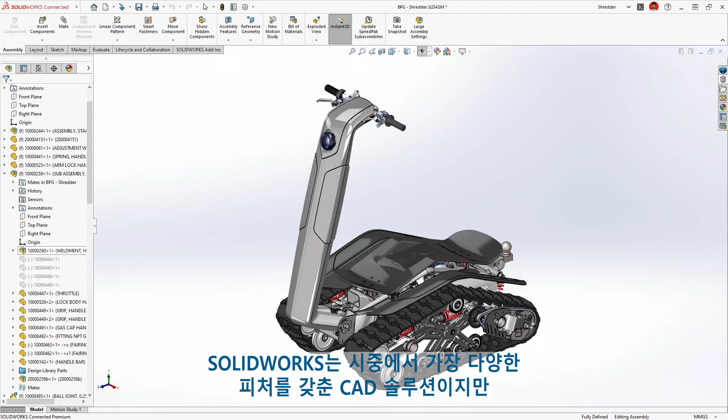SOLIDWORKS is the most feature-rich CAD solution available, but that doesn't mean significant improvements can't be made. In SOLIDWORKS 2023, we focused on expanding the capabilities of existing features to make you more productive.

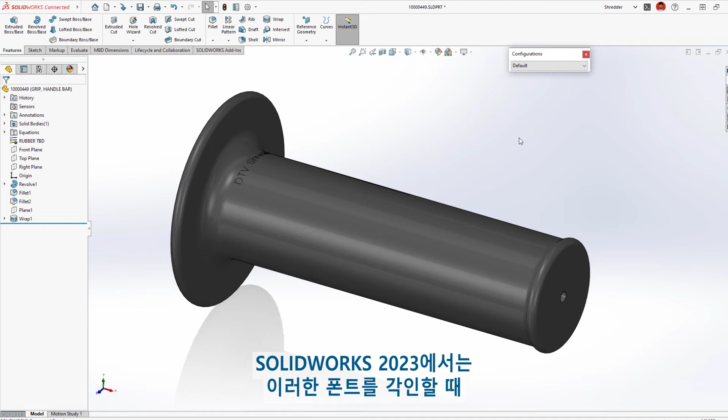Inscribing information such as serial number or model names into cylindrical surfaces is best done with single-line fonts. SOLIDWORKS 2023 allows you to inscribe these fonts using the wrap feature.

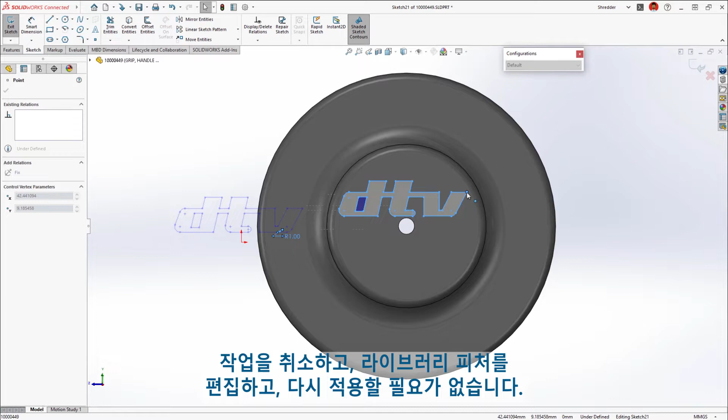Adding the DTV logo to the end of this handle is easy with library features, just drag and drop. However, in some situations, a reference may not be valid or otherwise broken. In 2023, you now have the option to keep the feature and solve the issue manually, rather than having to cancel the action, edit the library feature, and reapply.

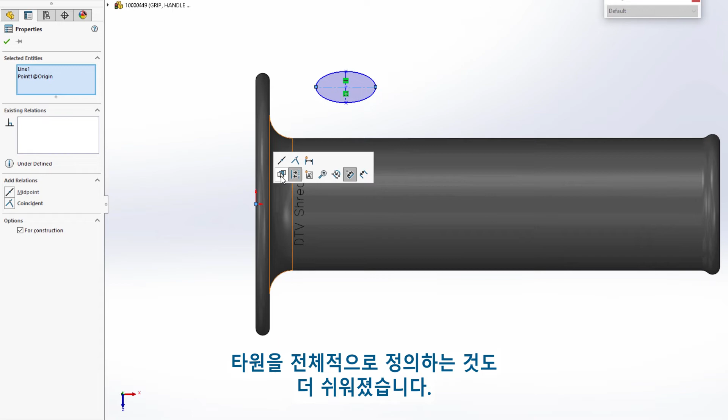This design is a good start, but the smooth surface may not provide enough grip for the rider. Let's create a pattern of ellipse-shaped bosses to give the rider confidence when traveling over even the most extreme terrain. In SOLIDWORKS 2023, you can now create ellipses with construction geometry, making orientation effortless by selecting a construction line, then choosing the appropriate relation. Fully defining the ellipse is now easier too, since you don't have to select multiple points to define the major and minor axes.

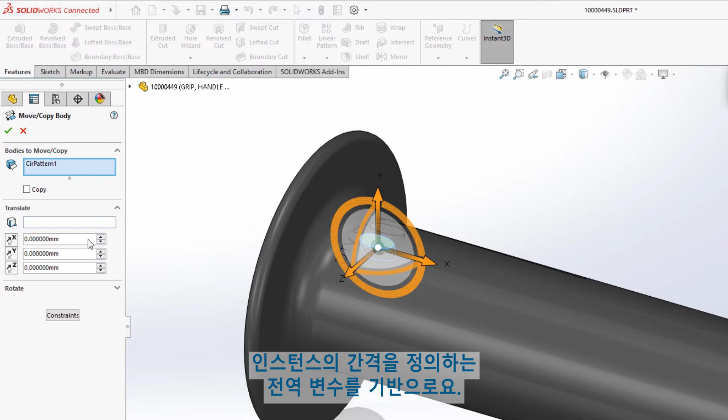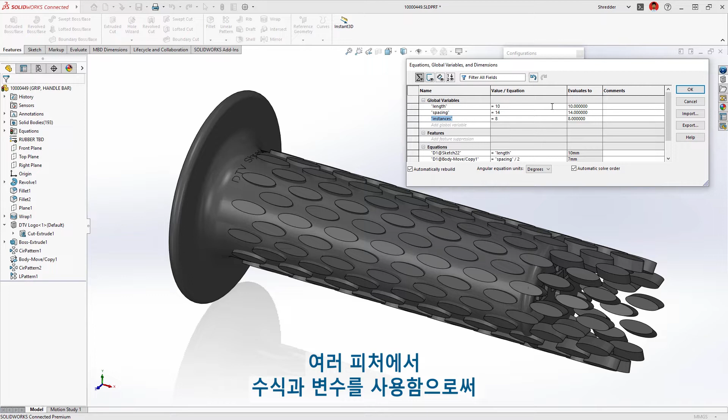Creating an offset body is easy in SOLIDWORKS, but how far along the handle should we place it? Since we're creating a pattern of these bodies, it would be best to define the parameter based on a global variable that also defines the spacing of the instances. In SOLIDWORKS 2023, the Move Copy Bodies command can now define translation and rotation of bodies with equations, even on a per configuration basis. A design like this tends to be iterative, so having convenient access to these parameters will save time. Using these equations and variables in several features allows us to make broad changes without having to edit each individual feature.

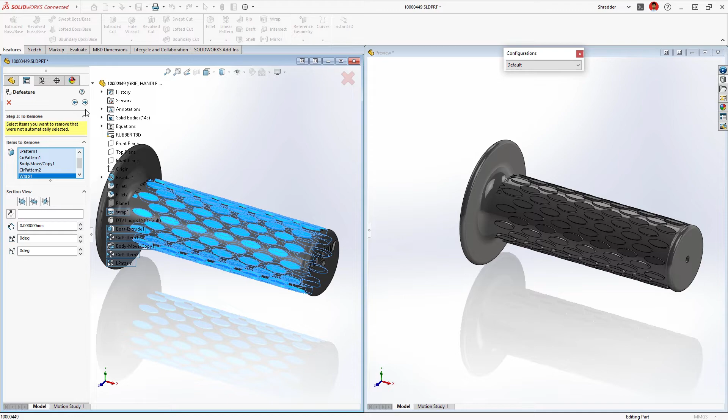Finally, reducing part complexity and protecting intellectual property are a great use of the defeature tool, but in some cases you may not want to create a whole new part that will need to be managed, stored, or otherwise lifecycle managed with a PDM system. SOLIDWORKS 2023 SP1 will allow you to create a configuration of your defeature parts, which can be useful for creating simplified versions. And since it's a derived configuration, it will adopt changes made to its parent configuration. Also, replacing the complex version of this component in the assembly no longer requires selecting a new part file and reattaching mates. Simply select the configuration from the drop-down menu.

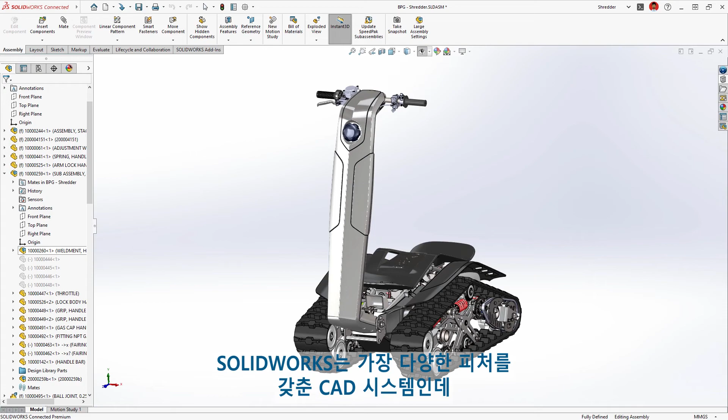SOLIDWORKS is the most feature-rich CAD system, and now those features are even better with this latest release. Whether you're sketching, inscribing text, or working with bodies, these tools are even more flexible, giving you more ways to increase your productivity than ever.